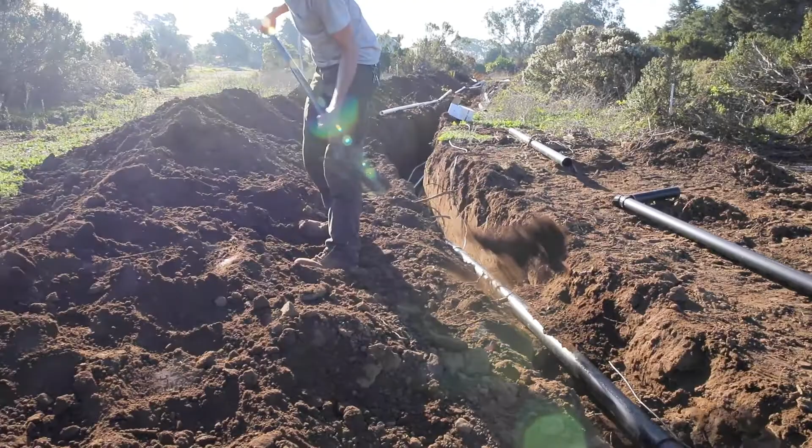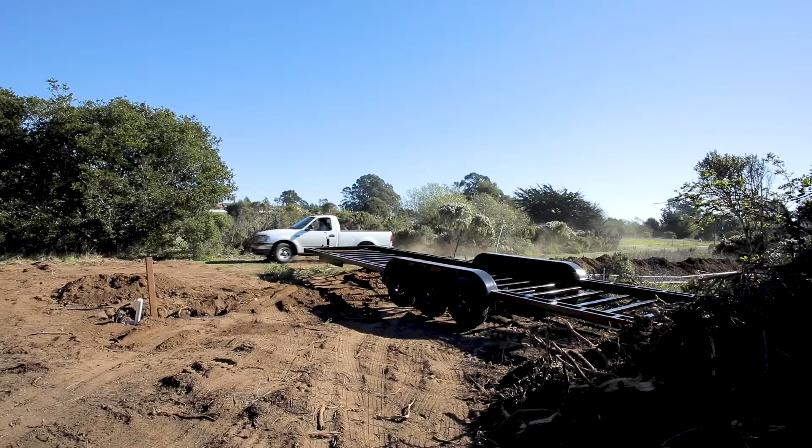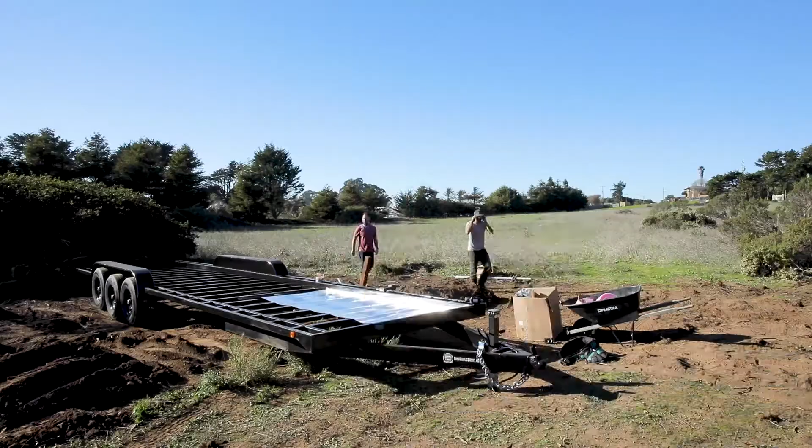So as you can see, we had trouble getting the tiny house trailer in position. It's a 32-foot trailer, and when you're gonna go big like we're going, that has problems to go with it, especially when we wanted to fit it in an area where we had foliage all around to get some separation between us and the road and the house. You know, when you're trying to back a trailer into a tight position like that, it can be very difficult.

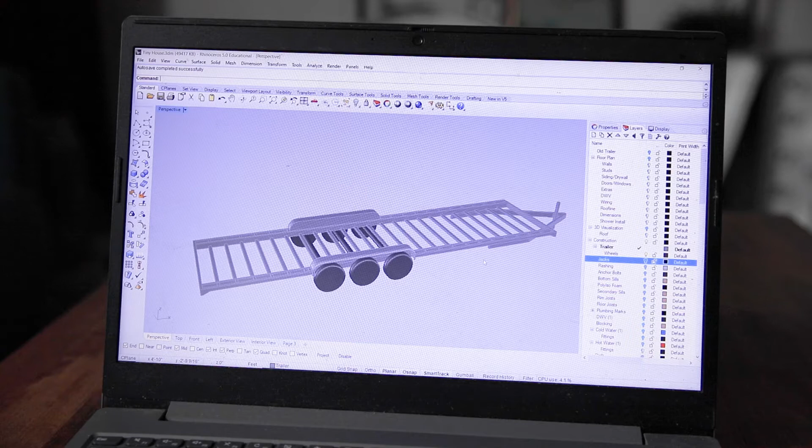Here we have our trailer, and the first step will be to install the anchor bolts. Anchor bolts are basically large screws that will attach the trailer to the sill plates. You'll learn more about sill plates in our next episode, but for now, just understand that they are part of the tiny house floor that sits on top of the trailer. The positioning of these anchor bolts is crucial to ensuring the house is securely and firmly attached to the trailer.

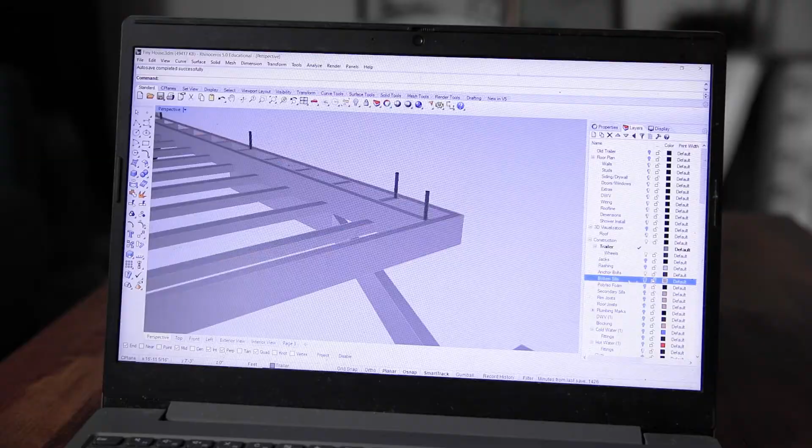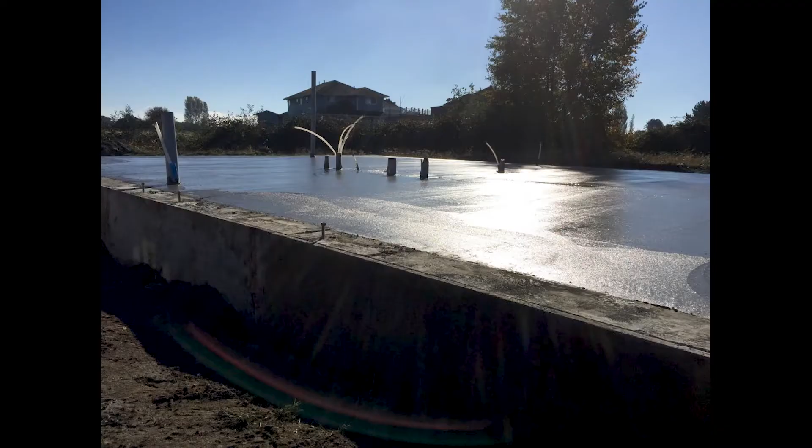Building codes require anchor bolts to be placed within a foot of each end of each sill plate and be no more than 6 feet apart. Even though we don't have to worry about building codes and inspections with our tiny house, they exist for a reason, and we will be sticking pretty closely to them. Unfortunately, we're also limited on our placement of the anchor bolts by the frame of the trailer, so we can't just place them anywhere like you can when you're building a house on top of concrete.

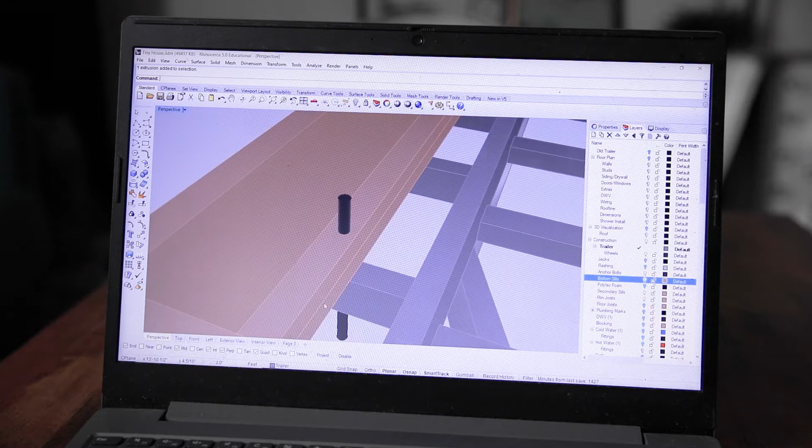We're further limited on our placement of anchor bolts by our rim joists. Now, we'll talk about rim joists in more detail in our next episode, but for now, just know they're these pieces of lumber sticking up right here. So you can see how I'm placing the anchor bolts so that they go through the frame of the trailer, don't come up at the same place as the rim joist attaches, yet are within a foot of each end of each sill plate and as close to every 6 feet as I could.

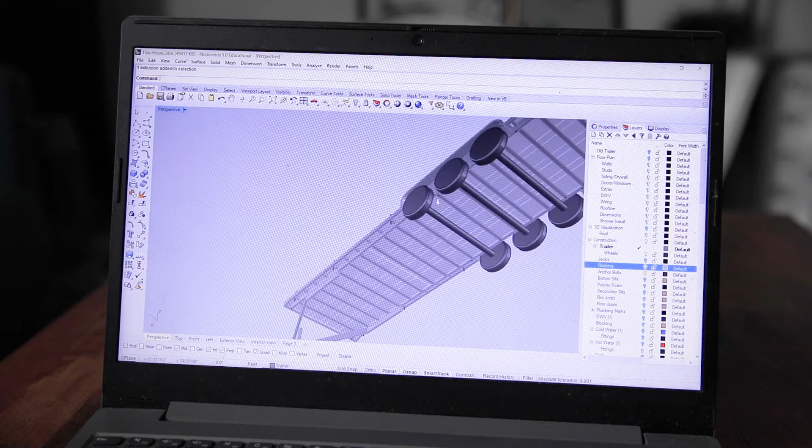Second thing we hope to accomplish today is attaching flashing across the bottom of the trailer. Now, flashing is just a metal sheet that comes in a roll and is just slightly thicker than the metal on an aluminum can. We are actually using aluminum because it stands up well against the salty coastal air we have here at our building location. The flashing will ensure that moisture, insects, and rodents can't make their way through the bottom of the trailer into the floor of the tiny house.

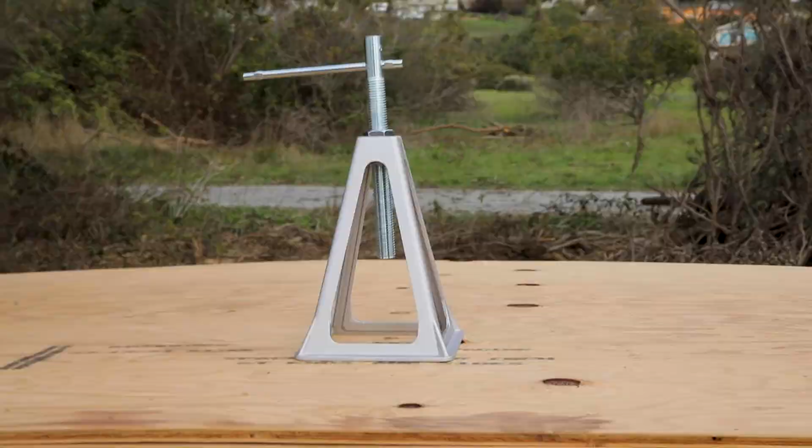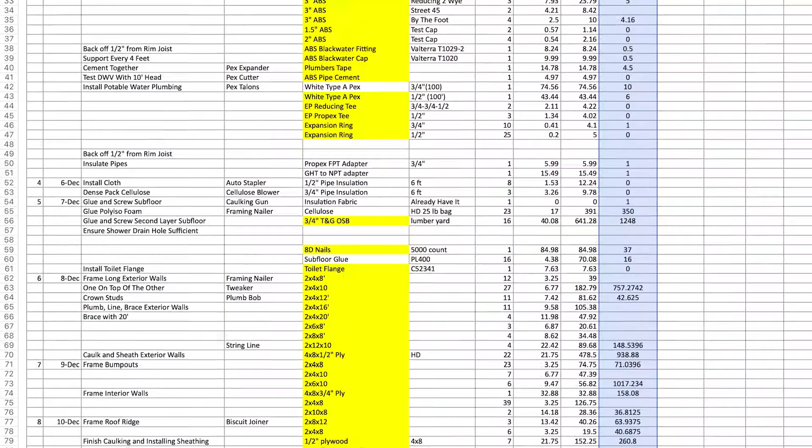The last thing we'll do today is install jacks on the trailer to level it out and properly support it. The wheels of the trailer are built for transporting it, not for supporting it for long periods of time. The jacks will perform this job much more efficiently than the wheels. To get the right size jacks, you need to calculate a rough estimate of the weight of the building materials you're using. So I've estimated our tiny house to be around 16,000 pounds, but that doesn't account for weight imbalances in the house from one side to the other.

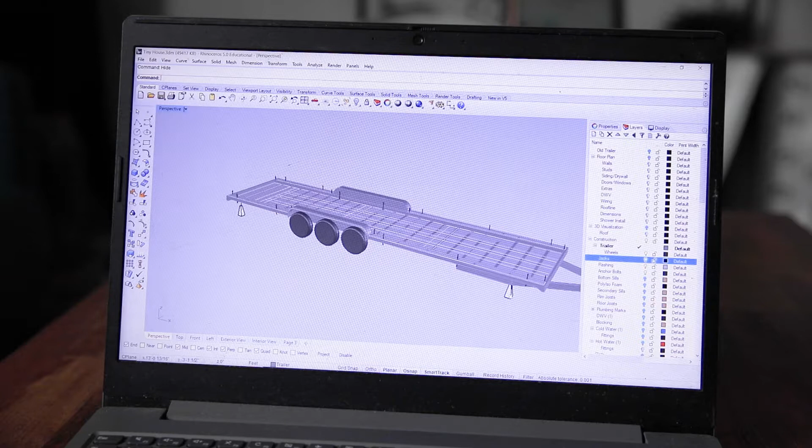The kitchen has countertops and refrigerator. That stuff weighs a lot. So, you know, it's not a consistent 16,000 pounds. Plus there's people moving around. So I threw in a little cushion and bought 4 jacks with each of them able to support 7,000 pounds. So 4 of them could support 28,000 pounds.

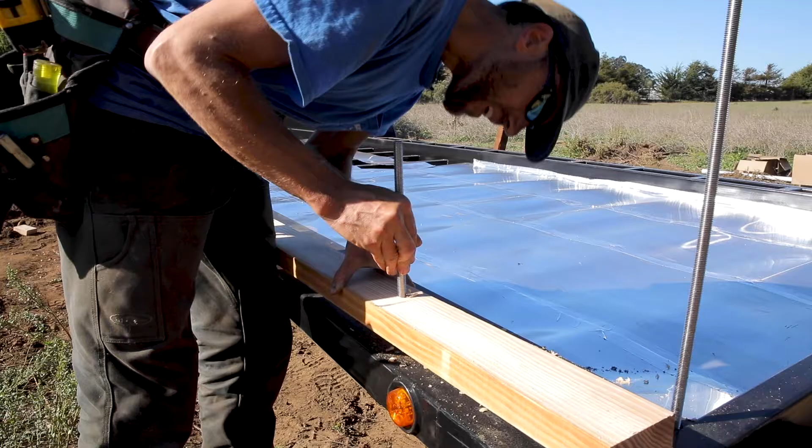Once you've taken the time to decide where you will place your anchor bolts, installing them is very simple. I needed extra long anchor bolts for some parts of the trailer frame that were extra thick. So I just bought some 3-foot long, 1/2-inch stainless steel threaded rods and cut them into 1-foot lengths using an angle grinder.

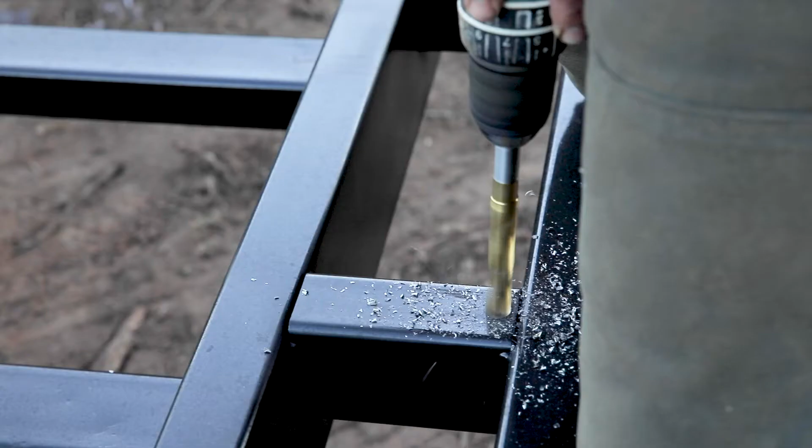We'll be using a 9/16" drill bit, just slightly larger than the 1/2-inch anchor bolts. The trailer framing is hollow in the middle, so you want to drill through both the top and the bottom of it. Sometimes I was able to do both the top and the bottom from the top. Other times I had to get down and drill up from the bottom.

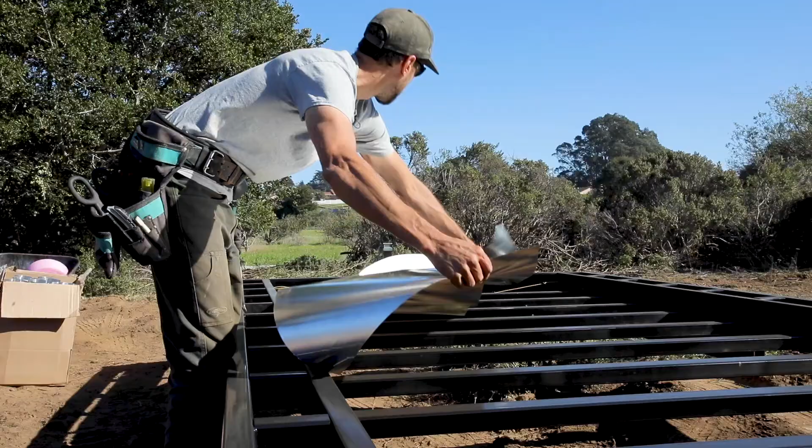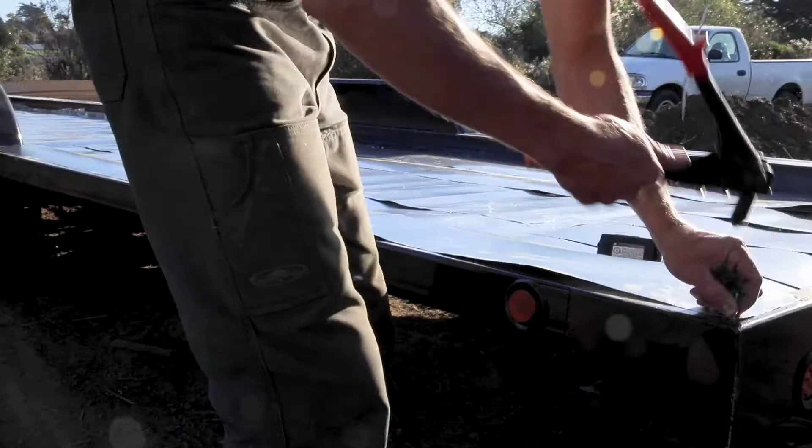To install the flashing, I just unrolled it and laid it down in place, then drilled holes for number 6 sheet metal screws. Now the steel of the trailer turned out to be too thick for the sheet metal screws, so I ended up using rivets instead. To use a riveter, first drill a hole just slightly larger than the rivet. For us, that was 1/8 inch. Now it's important to use a drill bit meant to be used on metal. Next, place the rivet into the hole and use the riveter to set it in place.

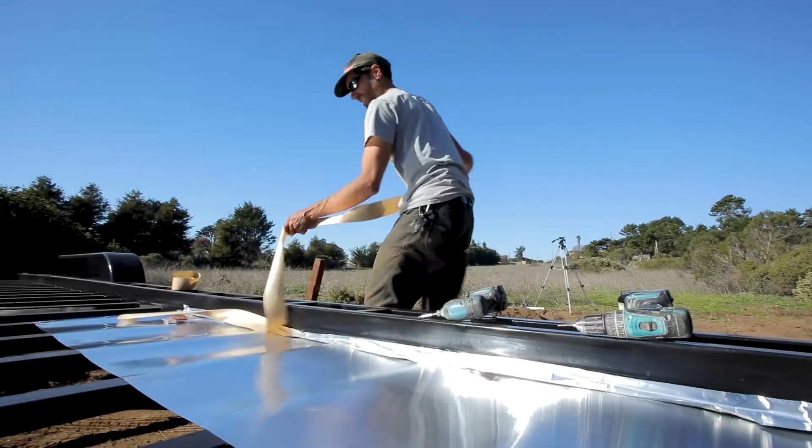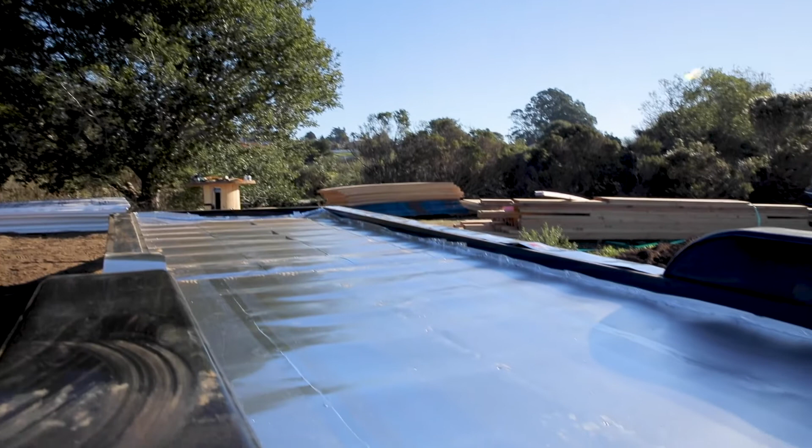I overlapped each sheet of aluminum flashing and then used foil tape to seal the overlaps. This will eliminate any cracks between the sheets for moisture or insects to work their way into the floor of the house. It's very important to press down hard on the tape to ensure a solid connection to the flashing. You can use stainless steel instead of aluminum if you choose, but just make sure to use the same material for your rivets as flashing because certain metals can react with each other and cause corrosion.

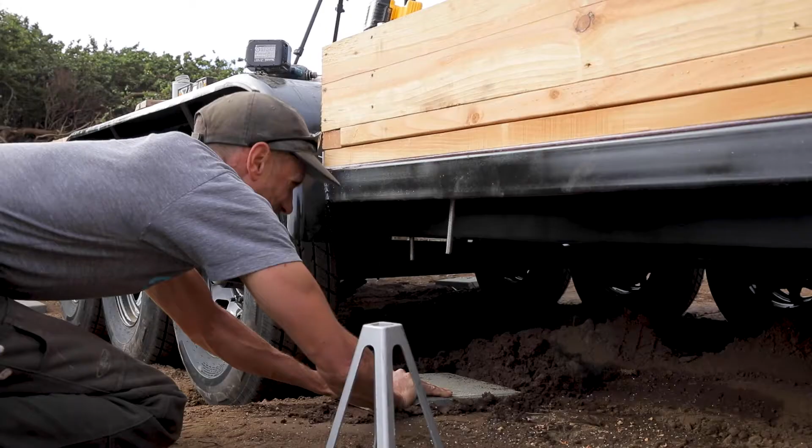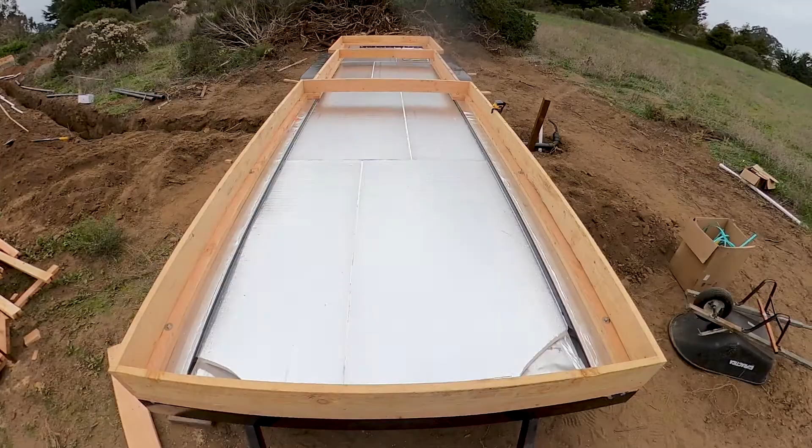To level the trailer, I had to dig out a little on one side and create a mound on the other side since we're building on a bit of a slope. I compacted the dirt using a hand compactor and placed a paver block down to make a nice solid base for each jack. Then I used a level and adjusted the screws of the jack until the trailer was level on all sides.

I want to take a minute each episode to tell you about some of the roadblocks I faced and how I overcame them. No matter how skilled and experienced you are, mistakes and oversights are inevitable. And I want to make sure that if you decide to build your own tiny house, you're prepared for these setbacks and you're able to overcome them. Don't get down on yourself.

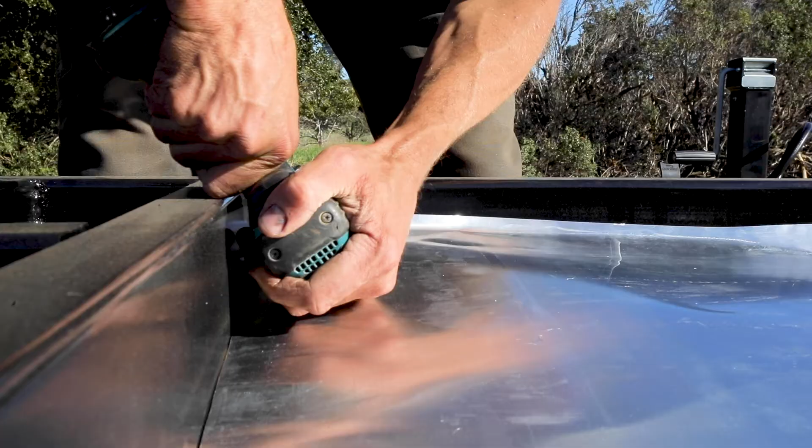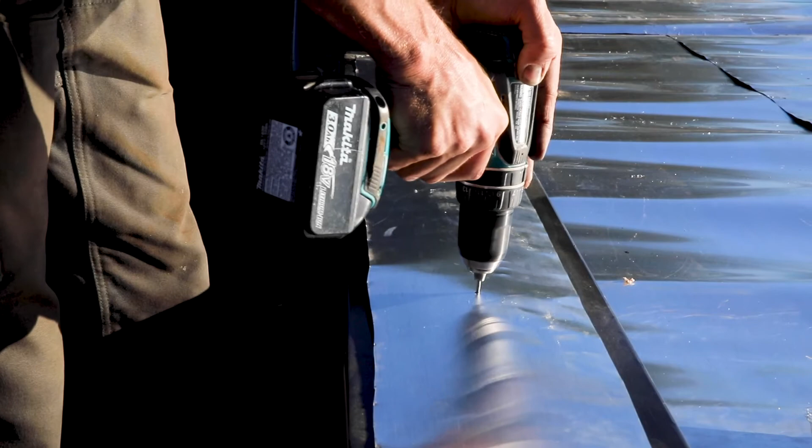In this episode, I had originally planned to use sheet metal screws. I had ordered them and was ready to go, but I quickly realized that the trailer metal was too thick to hold them. The metal was also too thick for my drill bits and I was breaking a bunch of them. I had to stop what I was doing, take a step back, and figure out a better plan. I decided to drive to the hardware store, buy some rivets, and fasten the flashing with aluminum rivets instead. It ended up working much better.

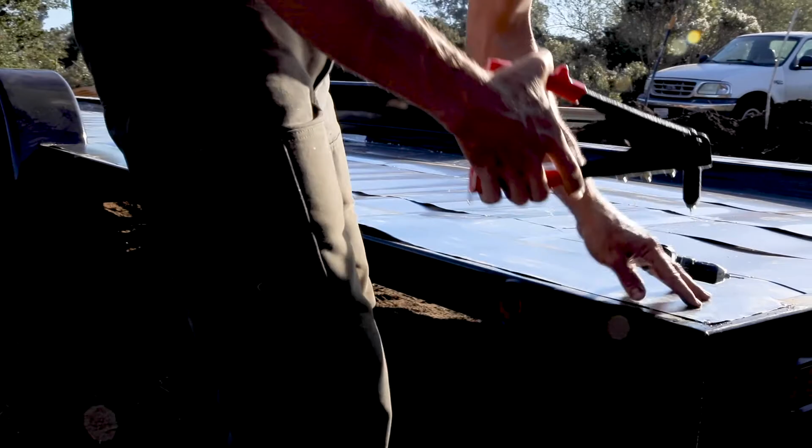I had to go to the store again when I realized that I either misplaced one roll of flashing or Home Depot shorted me when they delivered it. I hadn't checked the delivery when I received it, so I hadn't noticed it was missing until I needed it. The combination of these two things set me back a day, and that was frustrating, but you'll face frustrations like these all the time when you build.

I'm going to tell you about every mistake I make because if you decide to build your own tiny house, I want you to be prepared to face the frustrations and don't get down on yourself and start thinking that you aren't capable of building a tiny house. Anyone who is passionate about it and resilient enough to work past their mistakes can do it.

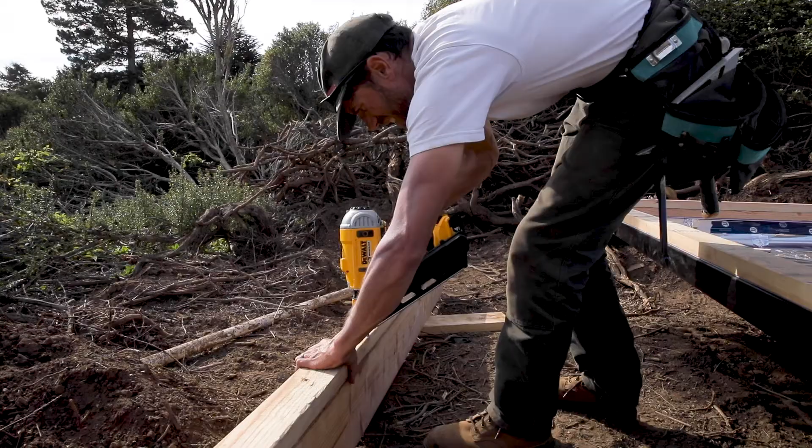In our next episode, we will be building the subfloor framing of the tiny house. The subfloor is the plywood that supports the finished flooring that we will walk on inside the house. And the subfloor framing is the wood skeleton that supports the subfloor. I hope you can all join me on the next episode as I build the subfloor framing.